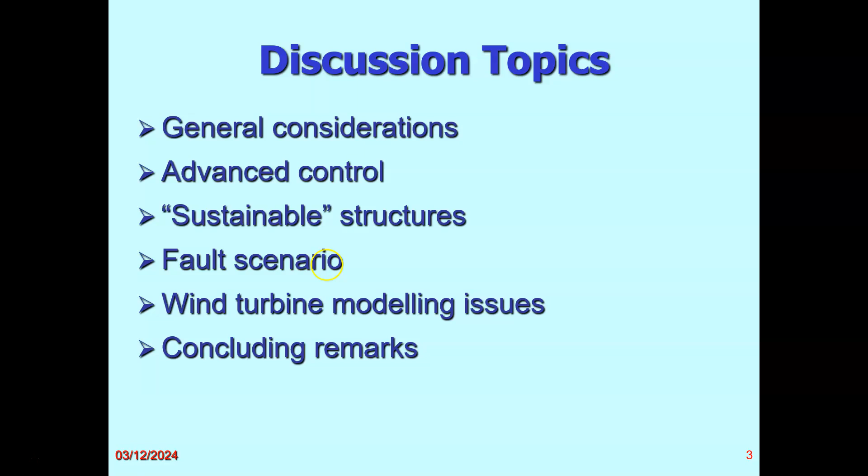So the idea was to develop some sustainable structures, as written here. The idea of sustainable, as will be described later, means that this process, this plant, needs to continue to work even if some unexpected faults, malfunctions in general, are affecting the system. We will also investigate, I will just mention some modeling issues regarding wind turbine, and then we'll finish the first part of this discussion with these general remarks.

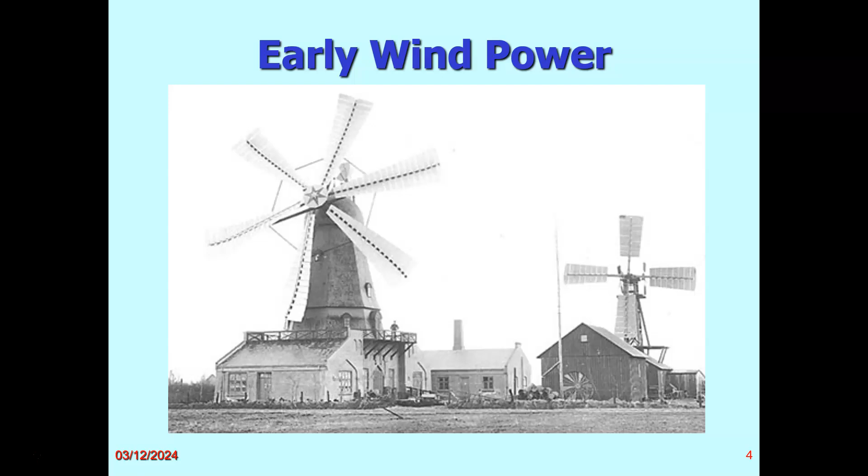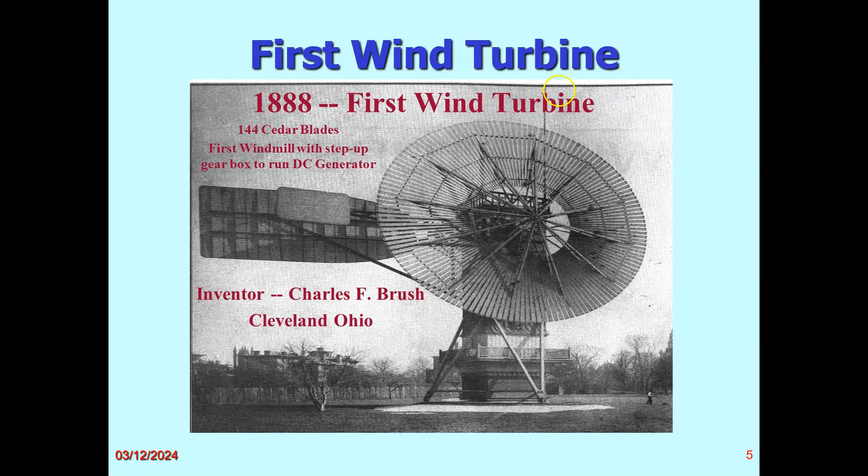In this picture, we have the early wind power development. As you can see, they were very simple, very basic plants with a different number of blades. In this picture you can notice 6 blades, 4 blades. Normally they were connected not really for the production of energy, but for the development of mechanical energy that was used, for example, for grinding or for mechanical processes. In fact, the first wind turbine was in 1888, and we needed to wait for the development of a DC generator before they could be used for producing energy. So the first plant was in Cleveland, Ohio.

So the idea of the wind energy function is quite simple, because from the left side you have a wind turbine generator. You can see here the blades. Normally you have 3 blades because you get a good balance with this system. They also tried with 1 blade or 2 blades, but especially for the one-blade system it was really difficult to maintain, due to the imbalance of the nacelle. We will see later. So normally in the nacelle, which represents the core of your wind turbine, you have a gearbox which transforms the speed from a low speed of the blade shaft to a higher speed of the generator shaft, and then the torque is also modified in order to run the electric generator.

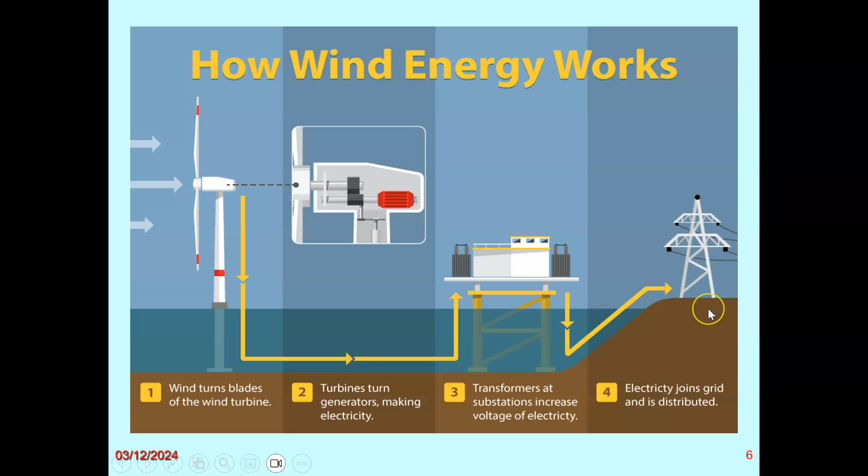There are also 2 gears used for moving the nacelle in order to always face the direction of the wind. Then you transport your energy to the transformer, in the transformation module. Normally it is transformed into higher power energy, and then it can be distributed around. So the wind energy process, of course, is very simple, used to generate mechanical energy and transform it normally into electricity.

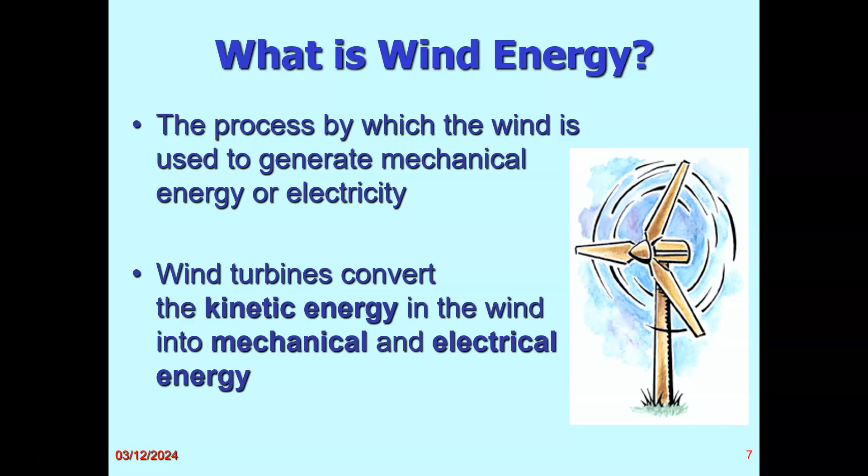Can I ask a question? Based on your explanation, you have vertical and horizontal kinds of wind turbines. In this case, which one has the better performance if you want to install it in certain places? Generally, under the same situation or condition, which is better to install, vertical or horizontal, to achieve more energy?

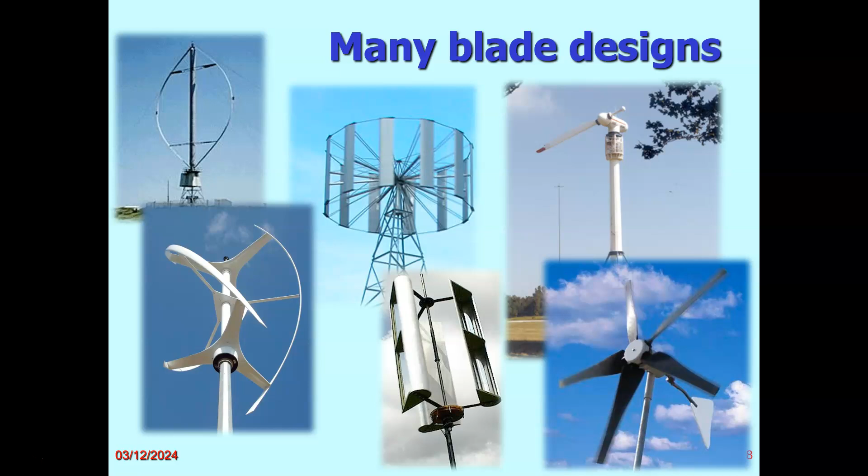Thank you so much for the explanation. So there are three examples, on the left side and the right side.

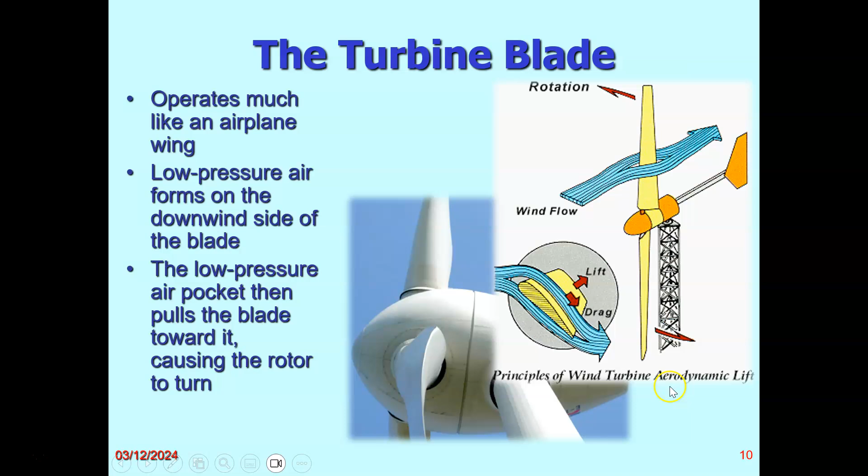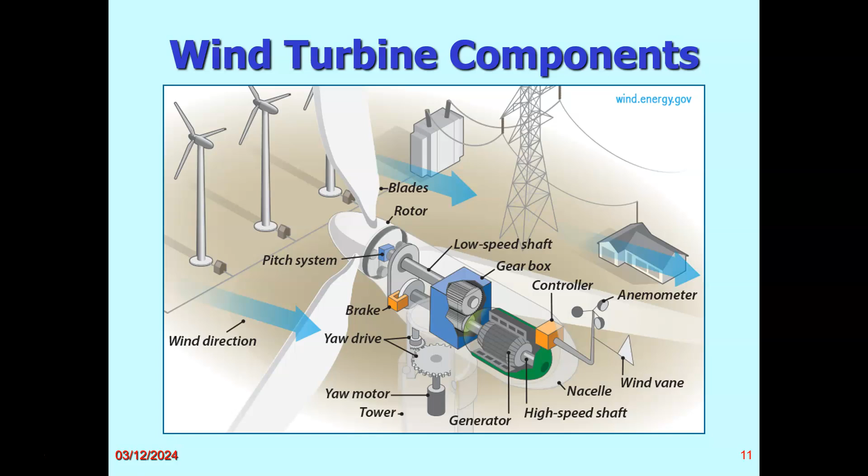So the produced energy - there is an important simple picture here that includes a physical law used for estimating the produced energy. In principle, you consider a pipe generated by the wind, just the section of wind which is hitting the blades. You consider the diameter of this disc, as it's technically called, so the diameter or radius of your blades is important. As mentioned here, the turbine blades are removing energy from the wind, so you have higher velocity, higher energy in front, and lower velocity, lower energy behind the wind. V is the wind speed.

So the generated power in the wind depends, by a physical law, on the density of the air, the turbine blade diameter, the velocity of the wind, and a constant. As you can see, the power of the wind is important because the third power of the wind speed rules the generated power. So you normally play with the wind speed - when you need to install a wind turbine, you must select and investigate; there are some investigations required before you can install a wind turbine.

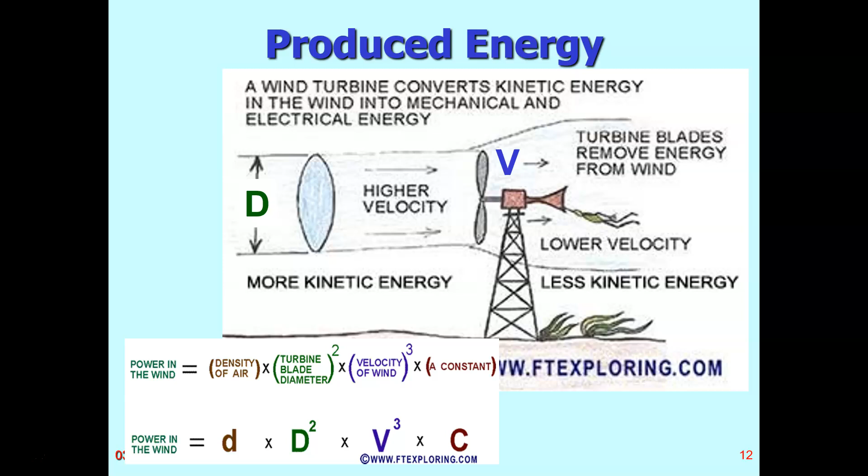So this is why normally there is great attention paid to where you want to install these systems.

From the other side, you must consider the environmental impact, because normally you have what we call the disco effect. This means that the rotation of the blades generates this kind of noise with a lower frequency content, so it can be disturbing.

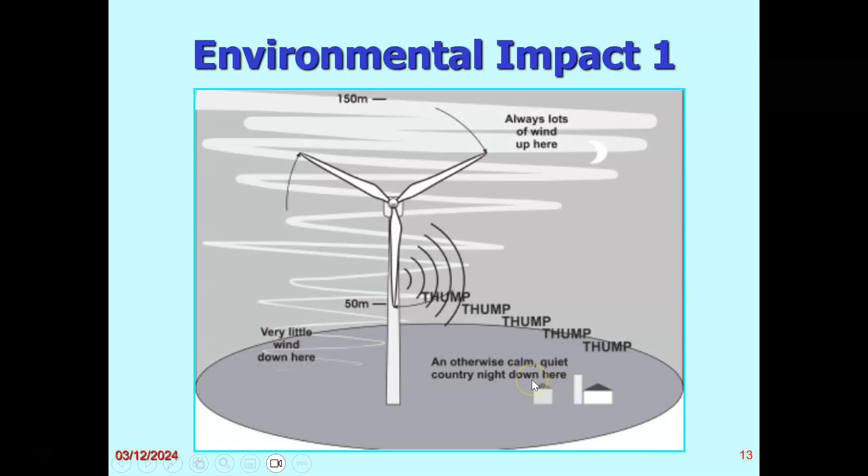So that's the motivation for these wind turbines to be installed very far from cities or civil areas, in order to reduce the environmental impact. The second problem: you can think of installing them, for example, in the open sea, very far from the coast, which we call offshore.

Offshore, you have another problem, because normally you have an impact with the sea. You have an interaction also with the waves, which is quite important, since you have a structure in the sea. You must also consider the interaction with the habitat, fisheries, acoustic disturbances generated in the sea, and also, because they are connected to transport energy, you have electromagnetic fields that can interact with the environment. It's another problem you must consider.

As I already mentioned, these vertical axis wind turbines, as you can see here, are examples of small wind turbines. They can be also—

Could you go back to the previous slide, please? This one? This slide is talking about the wave, coming from the sea, going through the wind turbine installed near the sea. Is there any possibility to use, at the same time, energy created with the help of a wave energy turbine and also a wind turbine at the same time? You can associate them together, and at the end you would have one unique electricity energy. Is it possible? So is it possible to create energy with the help of two kinds of turbines, first wind turbine and second wave turbine?

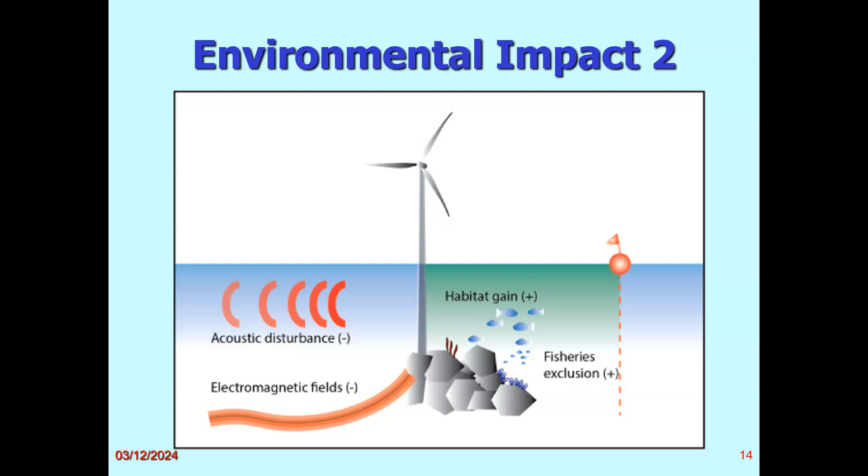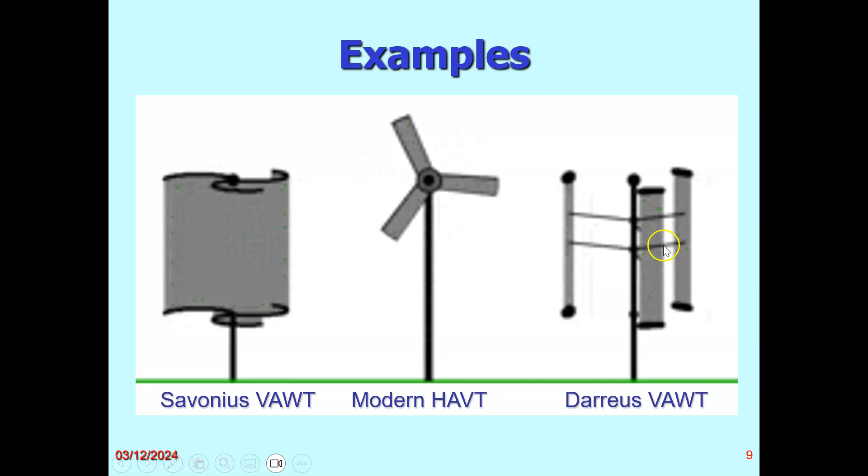So it's the same principle as the machines we saw here, with a similar diameter, but placed in the middle of the highways. There are some applications, but you must take into account that the produced energy is very small - you can use it, for example, to illuminate, to produce energy for lamps. So it can be used to reduce consumption. My idea would be to develop this in the future in order to light the street and also traffic lights.

Is it possible? Yes, for example we met a company here in north of Italy that was integrating this kind of vertical axis wind turbine with a small solar panel and then a lamp, which was installed in the street. So it was integrating both these renewable energies.

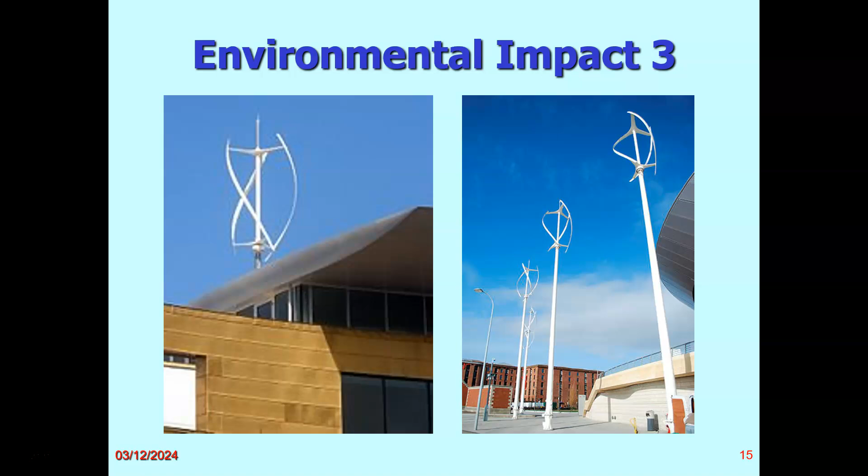What were their outcomes, good or? Well, it's just for reducing the consumption of energy, so you can save energy, but it's something for low power applications, something quite interesting. Yeah. Yes, okay, thank you so much. Thank you so much.

Brilliant explanation, thank you. So let's see some aspects regarding energy and the control issue. Normally, in connection with this system, the control system can have an influence on the total cost of the energy, because, for example, control represents the first way for controlling the production of energy.

Another important aspect is that control relies on condition monitoring. So it's very important to check, to supervise the system, and in particular, because you can expect that if the system is stopped, you are losing money, since it's something you paid for and it's not producing money. So when it's not producing energy, as soon as it doesn't produce energy, you are losing money. It's a principle of the market.

So it's important to integrate in these systems, in the software, what are normally developed as software tools - what we call condition monitoring. These are systems able to supervise your process and, for example, detect faults. A fault is something happening in your system that, for example, reduces the production of energy.

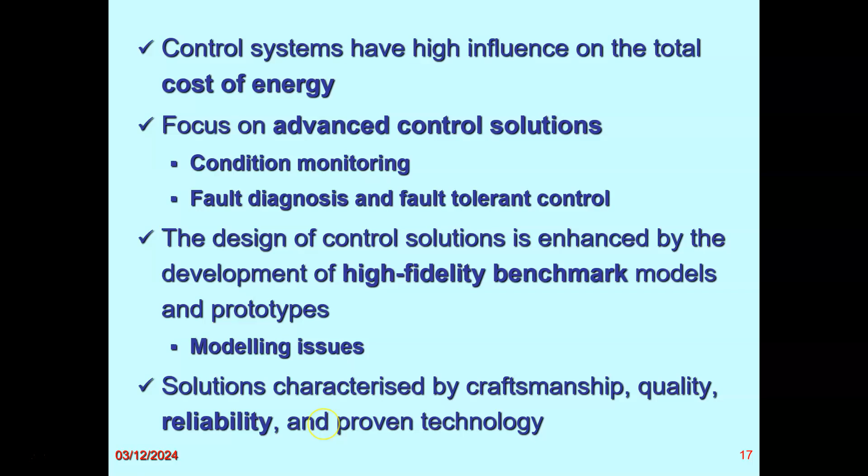Normally we are studying what we call sustainable control. Sustainable control is a solution, a way that helps your plant to produce energy and continue to work before maintenance can happen. Since we talk about installations in the open sea, it can be very expensive to rent a boat or ship for reaching your installation in the middle of the sea and repair it in order to continue to work. So the maintenance of your plant can represent a huge part of the cost of the energy.

Normally the cost of the energy depends up to 35% on the maintenance, operation and maintenance works. So it's very important to reduce the maintenance of your system if you want to reduce the cost of the energy. This is a picture of what can happen on your plant.

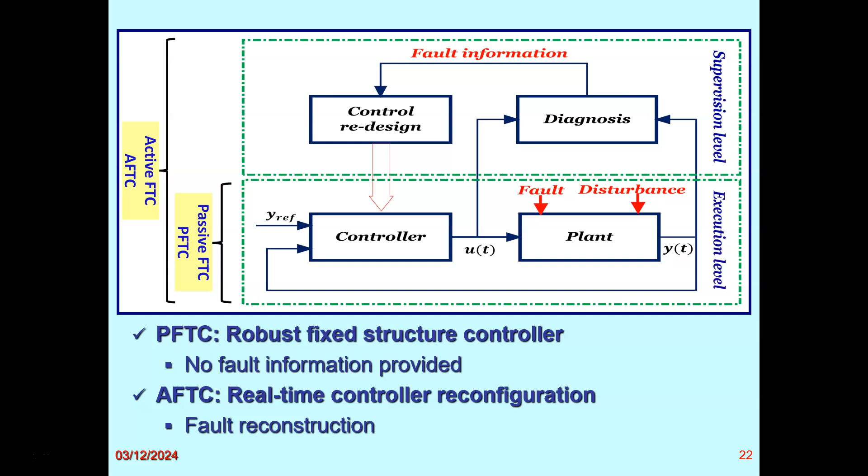So the best solution when you want to design a control is to use a strategy called active. Active means you have a fault diagnosis module that is able to reconstruct the fault information and help you understand which kind of fault is happening in your system, and then you can use it to redesign and modify your controller. This task is also called controller reconfiguration - you are able to modify your controller accordingly. I don't want to enter into the details because the mathematical focus would be very high, but it's just information I wanted to mention.

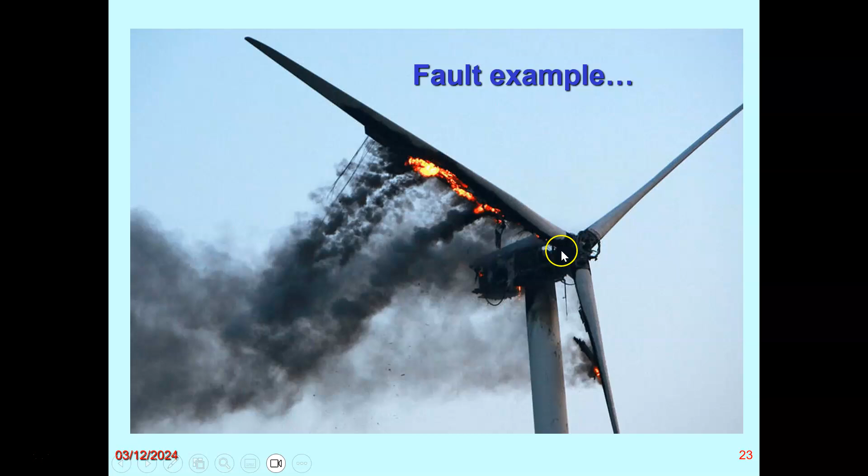This kind of turbine is fixed with the help of the soil at the bottom. Yeah, there is another - thanks for your remark. Yes, we have another type I will show later, called floating wind turbines, which are floating on the sea. They are just connected to the soil of the sea with some cables, but they are floating. It's another important type of wind turbines.

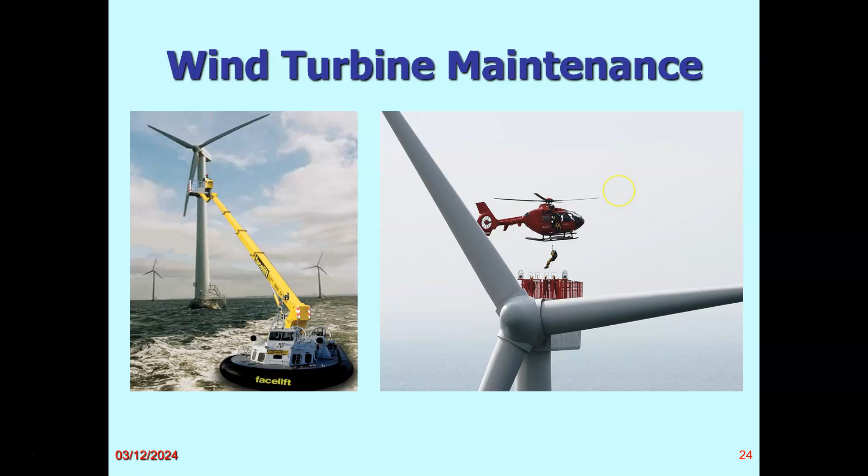Yes, thank you. And another example of maintenance work is shown in the picture on the right. It can be even more expensive to reach, for example, your nacelle, and an operator needs to go and check the nacelle.

Could you tell us more about the control? I mean, if the wind turbine creates maximum energy, maybe to save the blades, does the control try to stop the movement of the blades in high wind?

The controller, for example, is very important and also addresses something dangerous: with high wind speed, the blades can bend and hit the tower. So the controller modifies the pitch angle of the blades in order to reduce the rotating speed. This is one of the typical effects of the controller.

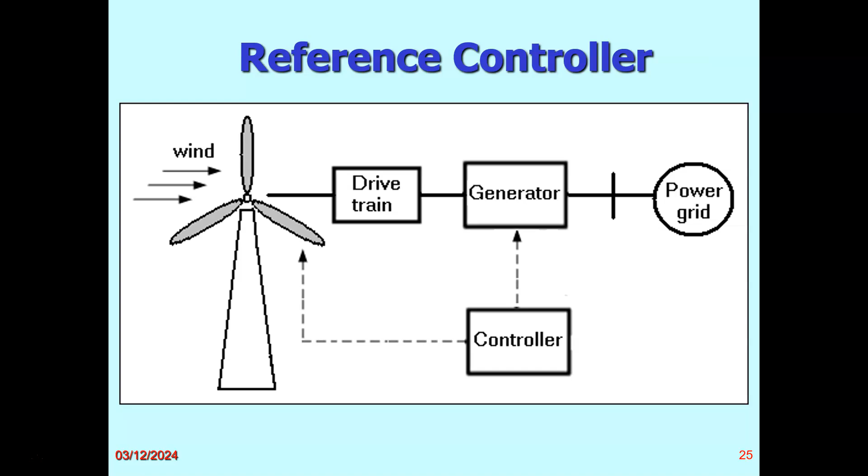When you are connected to the grid, you don't need to store energy, but you immediately transfer the power to the grid, and then other users can exploit it immediately.

Yes, thank you so much.

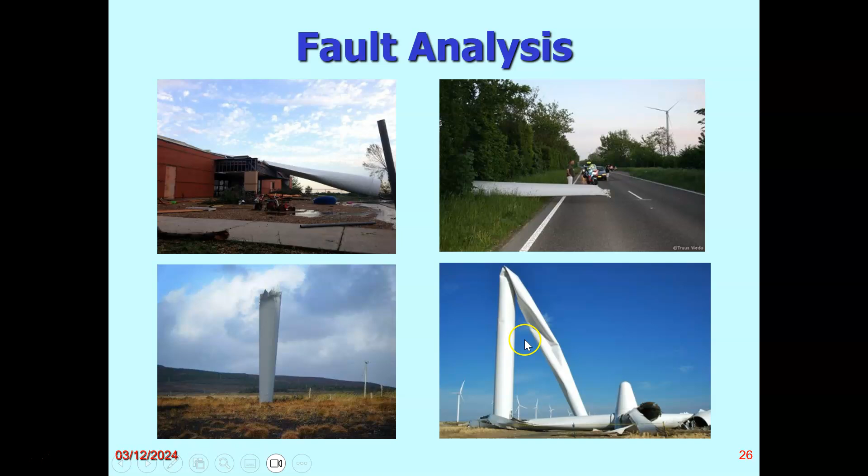So to conclude this first part of the seminar, which was devoted to wind turbines, we've just mentioned fault detection and isolation and fault tolerant control modules in wind turbines that are really necessary and required. Also, wind turbine benchmark models are required, because we need to test our solutions before they can be applied to real systems. We have FDI schemes that need to be developed, and together with FDI, FTC solutions that were proposed especially for application to wind turbines. The development of models for wind turbine systems is really important and challenging — for example, the benchmark launched in 2009, the first proposal for this international competition.